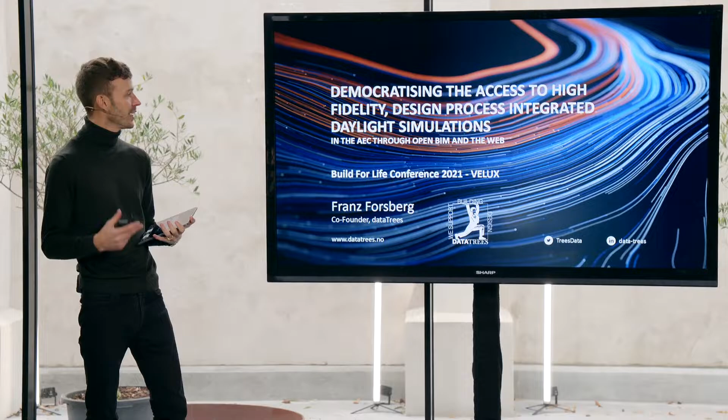My name is Franz Forsberg, and I'm co-founder of Data Trees. And I'm here to discuss how we are working to democratize the access to high-fidelity, design process integrated daylight simulations in the AEC through Open BIM and the web.

Briefly about us first, as a short introduction. I'm an architect specialized in sustainable environmental design, and my focus is to reduce the gap between architects and engineers. And as co-founders, we also have André Agui, an incredible architect who focuses on leveraging complex decision-making through algorithms and graphics. And we also have Stian Hagrim, who is an incredible BIM expert and system architect who connects buildings to technologies.

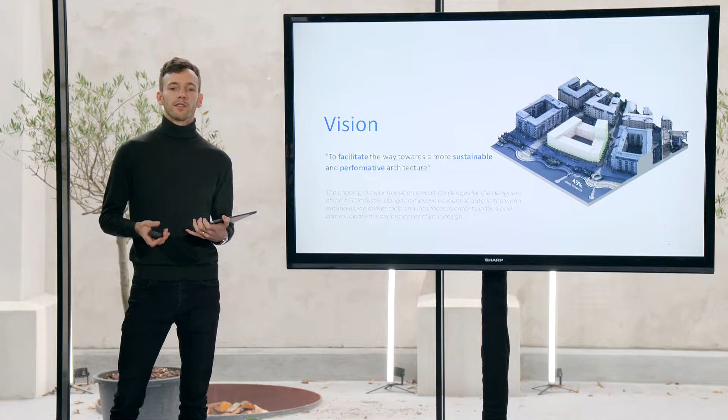What we do is translate architectural knowledge into algorithms by encoding architects' and engineers' expertise into powerful digital applications to leverage their intuition in all design phases. Our vision is to facilitate the way toward a more sustainable and performative architecture. Using the massive amount of data in the world around us, we deliver tools and interfaces in order to inform and communicate the performances of the design.

So now, let's see how we work in democratizing high-fidelity daylight simulation through Open BIM and the web. Why is that important? Let me tell you about a rising concern I see our industry is facing. The awareness of the important role of daylight for indoor occupants is growing from multiple fields, leading to better defined building codes or regulations, but also green label requirements and standards and recommendations.

In Scandinavia, we are required by our building code to provide satisfactory daylight conditions in our buildings and our regularly occupied rooms. And the Norwegian, the Danish, and the Swedish building codes differ in the methods for compliance, varying from simple window to floor area ratio to daylight factors or to climate-based daylight simulations.

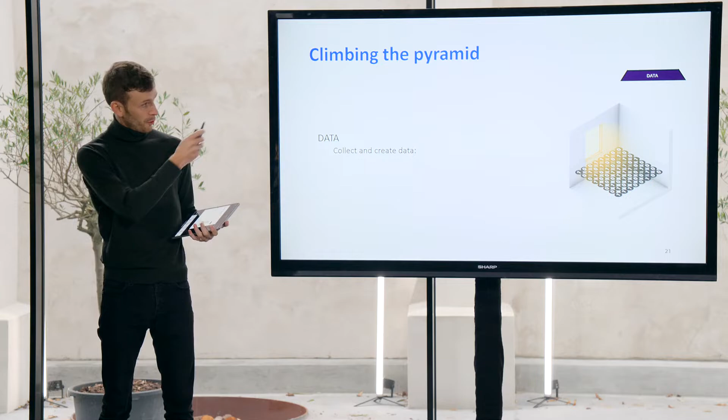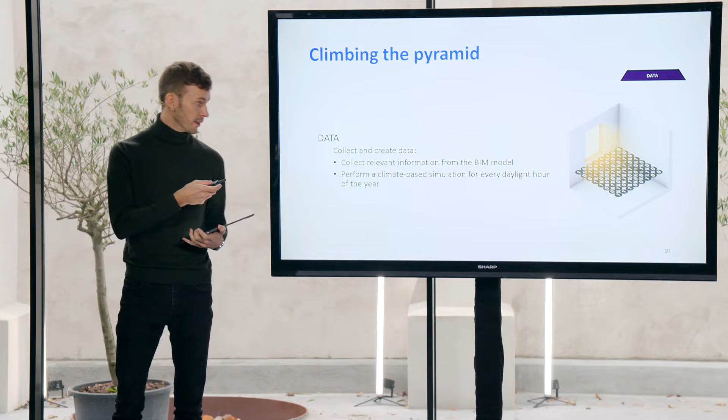First step is the data step. Collect and create data. Albert needs a lot of data to build its own experience. We can collect valuable data from the architect's BIM model, some metadata, but also, and most importantly, geometrical information. Then we simply need to perform annual climate-based daylight simulation.

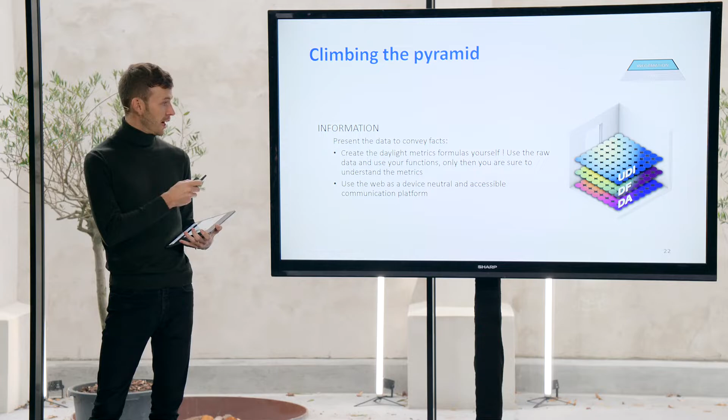Albert could then, as a second step, present the data to convey facts using the various climate-based daylight metrics to tell us about daylight availability in space, in time, glare potential, the uniformity of daylight, sunlight, glare potential. Oops. Albert lives in the cloud, so we will use the web as a device-neutral platform, the web browser, since it's accessible by everyone.

We need now to teach Albert to contextualize the information, to give a practical understanding. It's important for designers and everyone to quickly be able to grasp if a room complies with a specific requirement. It's important to rationalize the metrics to a simple yes and no answer. Albert can now give knowledge in a simple and clear manner.

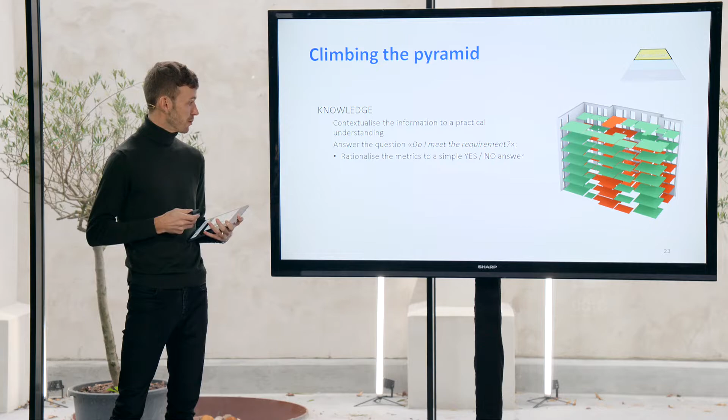Sometimes the question may be more subtle, and we may need a little bit more detail. And you would like to know, for example, if an east-facing room is receiving enough daylight in the morning or in winter. Therefore, it's important to go beyond the standards and to dive a little bit into research for inspiration.

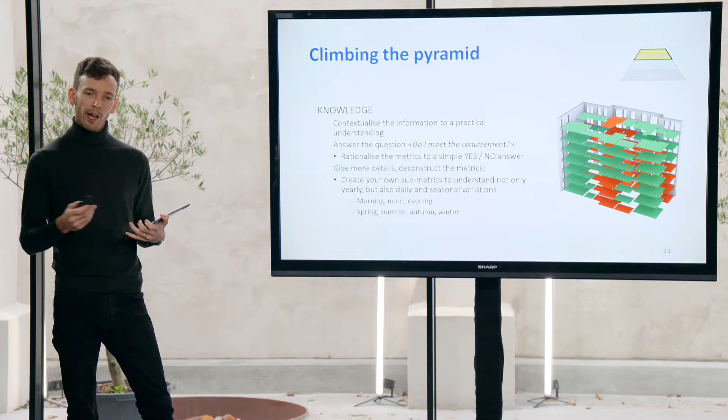Finally, wisdom. It's about making a sensible judgment. And how could Albert possibly make a sensible judgment? If we train our data and cluster various room-level recommendations with machine learning, Albert could do the heavy lifting of the consultancy. Of course, it's important for the teachers, us, the daylight experts, to always revise and perhaps complement the recommendations.

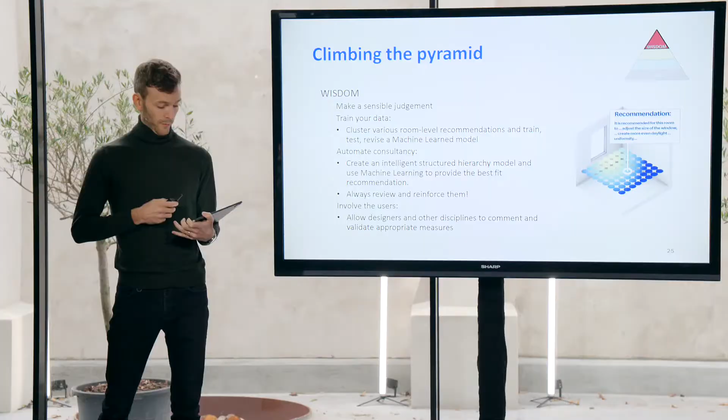We saw that research, regulations, and recommendations progress. There is therefore a need for spreading the advancement and better understanding daylight in our industry. And as more projects are being built or reformed, there is an increasing need for a design-integrated, reliable evaluation workflow. We need a tool for collaborative decision-making, a tool which for greater user value has to be convenient, fast, and reliable.

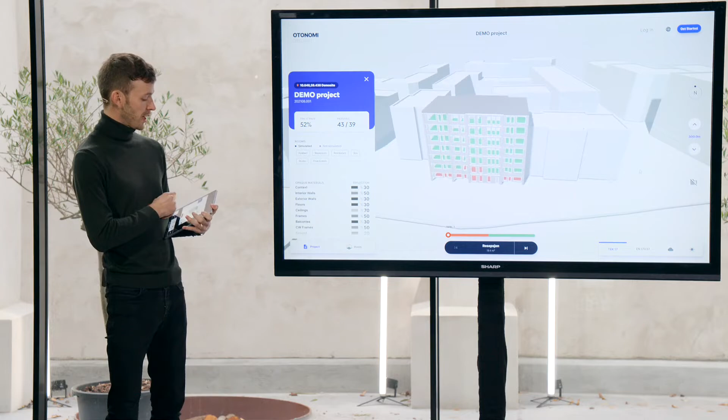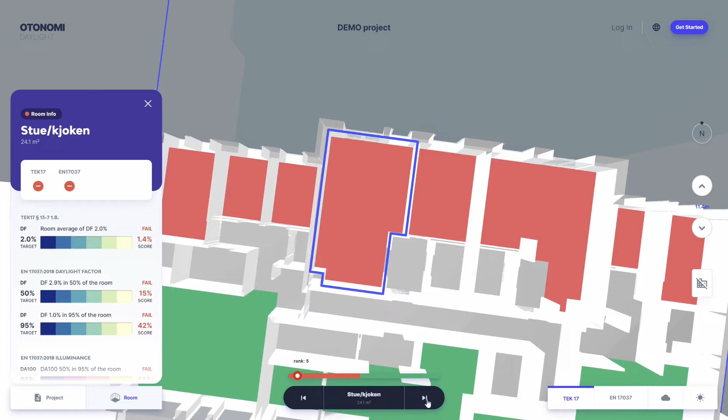Here is a short preview of our first attempt to amplify the architects and the engineer collaboration, where project information is displayed, rationalized, pass or fail, green or red information towards specific benchmarks, such as the local requirement or a green label, such as BREEAM or WELL, or point values are displayed in a 3D model. So how do we create that?

For the user, an architect, a designer, a BREEAM assessor, a municipality employee, who is looking to verify a project's compliance, a simple IFC can be used. And our market in Scandinavia, luckily, is very BIM dependent, and architects can export IFC files. IFC classifications and IFC spaces have the required geometrical information needed for a daylight simulation. The output of the simulation could also be exported through the BCF BIM format back to the model.

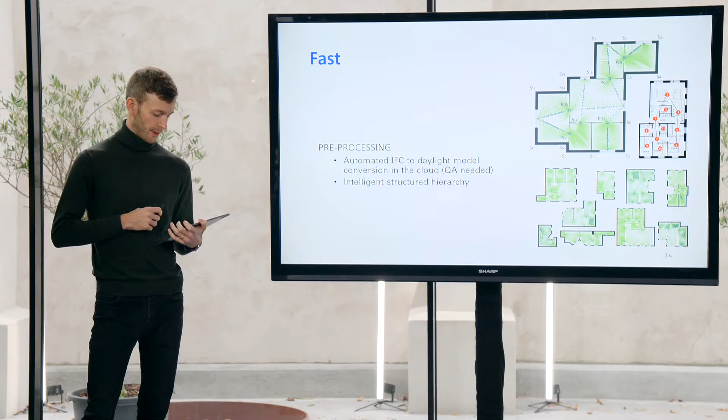Focusing on the web, computing is done on the cloud. So every device, a phone, a tablet, a computer, any operating system can access the simulated model in a 3D application, no files on your computer, and CAD-like editing is also possible. IFC to daylight model conversion can be done on the cloud, and a QA guy can quickly estimate the validity of the model and eventually do some corrections.

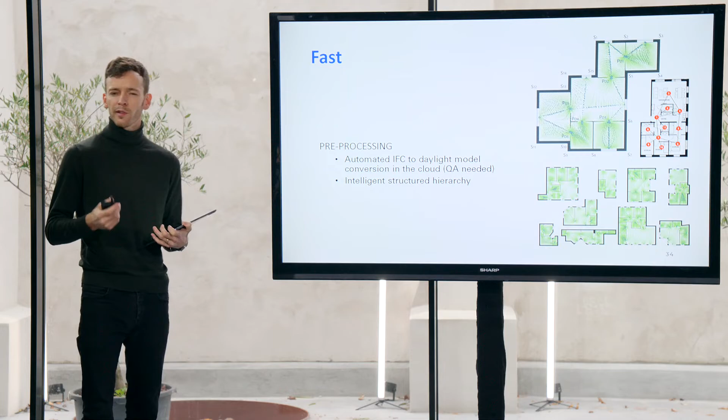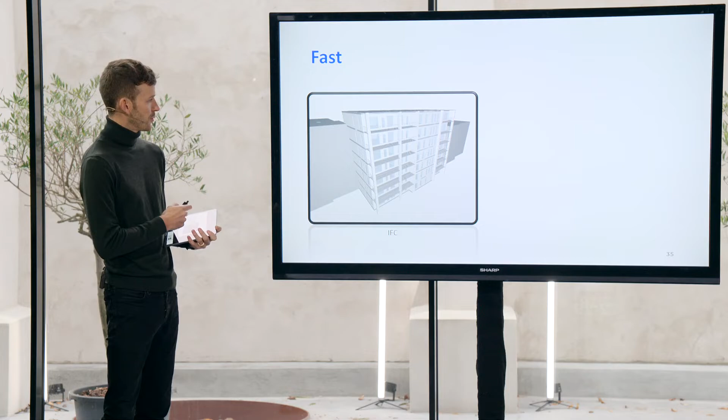Performant custom algorithms can understand an architectural project and classify rooms in a residential project to understand what is a bedroom, what is a living room, a kitchen. Other algorithms can also set appropriate light and reflection values to the geometries to convert an IFC file to a daylight model. Calculation speed has greatly evolved lately with multiple cloud solutions using CPUs, GPU local solutions, or you can also create your own architecture.

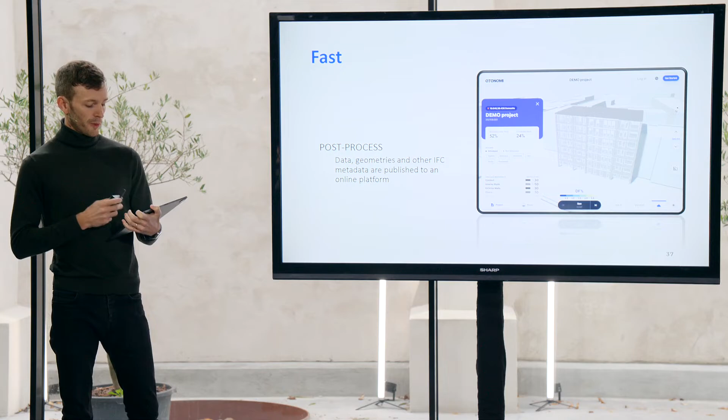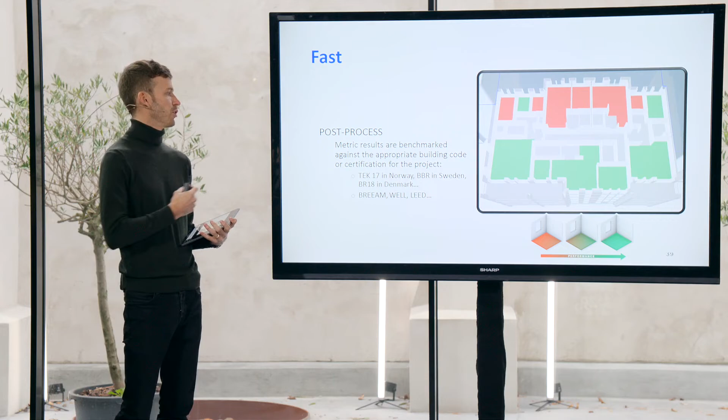Data, geometries, and other IFC metadata can be published to an online platform directly after simulations. Raw simulation data is uploaded to a server where custom functions calculate the appropriate metrics. And the metric results are benchmarked against a building code or a certification scheme. Well, of course, Radiance is the holy grail here. What else? But of course, you have to comply with all the standards and methodologies.

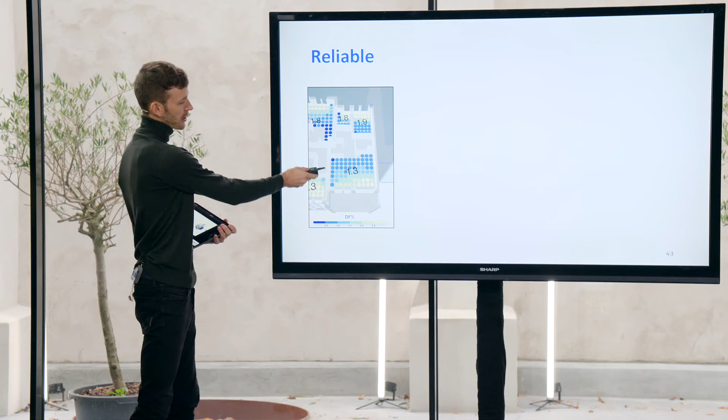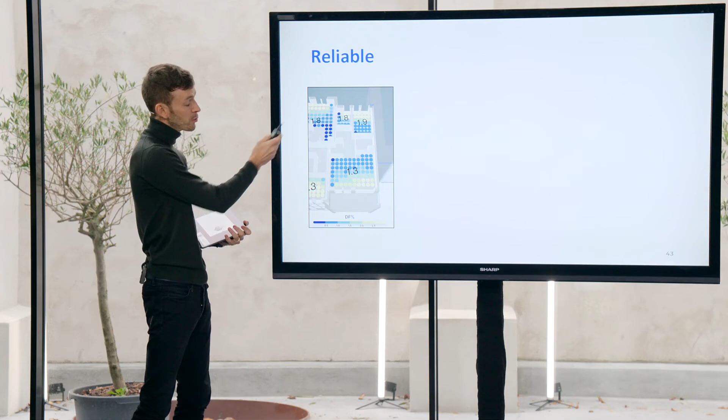Reliability is also ensured by measuring various metrics and looking at them together to understand the strength and weakness of each of them. Here is an example I like, of this project where this south-facing room has a daylight factor of 1.3. The north-facing room has a daylight factor of 1.9. Many consultants will unfortunately assess that this room has better daylight access,

but looking at how much of the room has lux values above 100, has spatial daylight autonomy of 100, we see that the south-facing room has much more light uniformity. UDI also gives interesting information. And we also see that the southern room also has much more annual sun exposure.

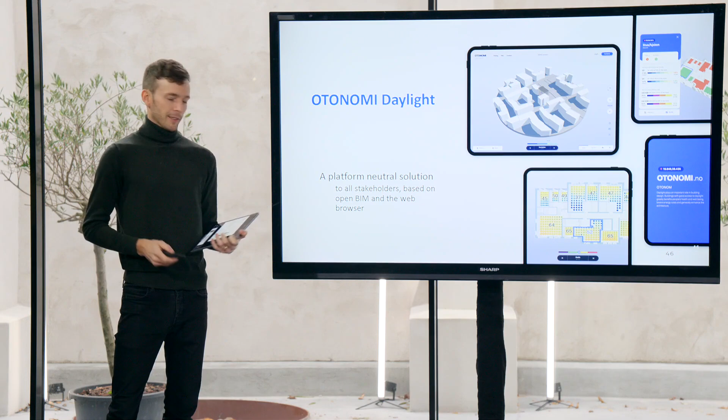Your data is knowledge. We must train it properly and make it help us to draw meaningful conclusions. Have your own butler at your service. We are still working on this part, so I won't show too much here. Take the lead, create your own collaborative platform, support our industry, support research. This is only our attempt to create a platform-neutral solution. Please help us deliver the same in your industry.